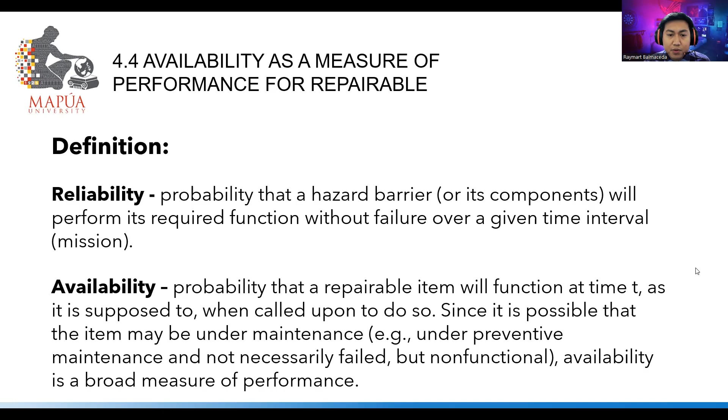As such, availability is the probability that a repairable item will function at time t as it is supposed to when called upon to do so. Since it is possible that the item may be under maintenance, such as under preventive maintenance and not necessarily failed, but non-functional, availability is a broad measure of performance. There are several representations of availability.

The most common ones are: number one, instantaneous or point availability of a repairable item at time t. A of t is the probability that the item or hazard barrier is functioning up at time t. Number two, limiting availability, or A, is defined as the following limit of instantaneous availability A of t, wherein A is equal to the limit of A of t as t approaches infinity.

Number three, average availability, or A bar, is defined for a fixed time interval t as A bar is equal to 1 over t integral from 0 to t A of t dt. And number four, the respective limiting average availability is defined as A1 bar is equal to the limit of 1 over t as t approaches infinity integral from 0 to t A of t dt, as shown on equation 4.25.

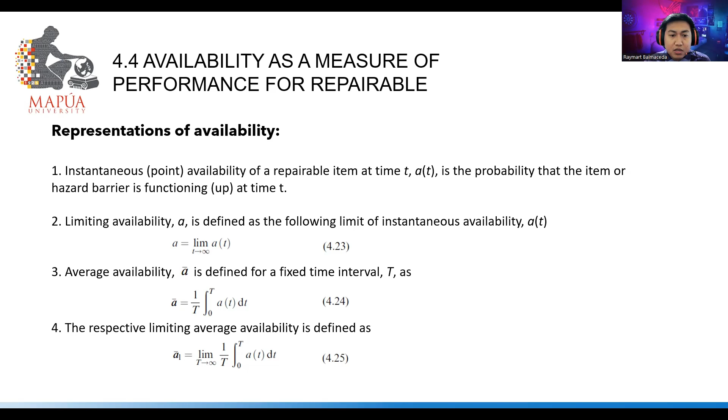So it should be noted that the limiting average availability has narrow applications. We elaborate on these definitions of availability in the next slides. If a hazard barrier or item is non-repairable, its availability coincides with its reliability function, R of t, wherein A of t is equal to R of t, equal to the equation as shown in equation 4.26, where lambda t is the failure hazard rate function.

The unavailability, Q of t, is obviously related to A of t, as Q of t is equal to 1 minus A of t. So from the modeling point of view, repairable barriers, or here hardware items, can be divided into the following two groups. One, repairable hardware items for which failure is immediately detected, or revealed faults. And two, repairable hardware items for which failure is detected upon inspection, sometimes referred to as periodically inspected or tested items.

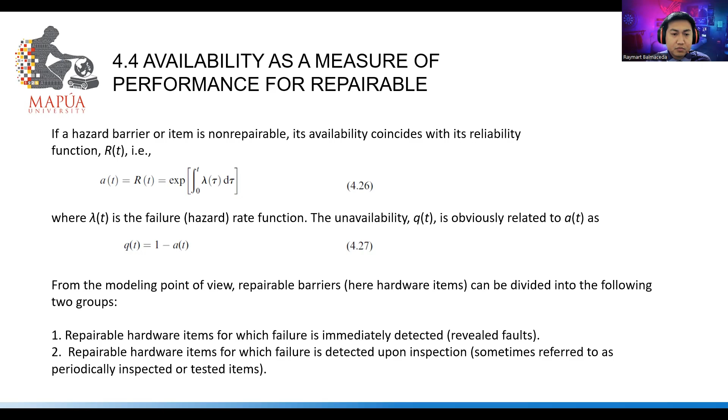Next, we go to 4.4.1, instantaneous or point availability. For the first group of hardware items, it can be shown that by using a Markov process representing two states of down and up, the probability that the item remains in each of these states are availability A of t and unavailability Q of t, respectively. The following system of ordinary differential equations represents this Markov process.

So the derivative of A of t is equal to negative lambda of t A of t plus mu of t times Q of t. And the derivative of Q of t is equal to lambda of t multiplied by A of t minus mu of t multiplied by Q of t, where transition rates between the two states are ROCOF lambda of t and the rate of occurrence of repair or maintenance mu of t.

In this case, examples of the mathematical forms of lambda t and mu of t are those of 4.12 and 4.17. For the simple case where no trend in the ROCOF and rate of occurrence of repair exists, solving 4.28 yields the equation 4.29. Note that in 4.29, mu is equal to 1 over tau, where tau is the average time required to repair or maintain the hardware systems. Sometimes, tau is referred to as the mean time to repair or MTTR. Clearly, MTBF or mean time to failure is equal to 1 over lambda in this case.

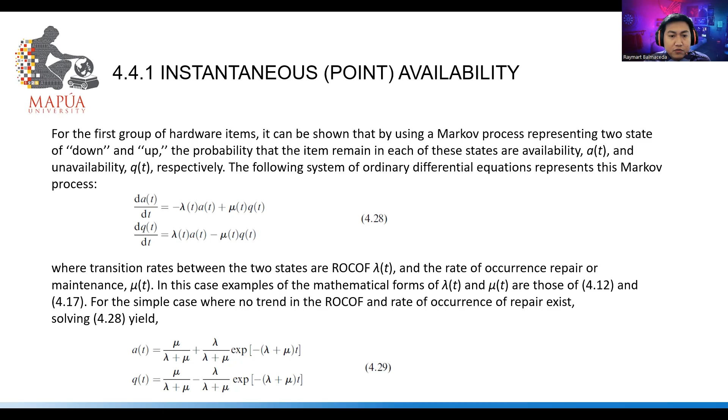For simplicity, the pointwise availability function can be represented in an approximate form. This simplifies availability calculations significantly. For example, for a periodically tested or inspected item, if the maintenance, repair, and test durations are very short compared with the length of operation time and the maintenance, repair, and tests are assumed perfect, one can neglect their contributions to unavailability of the system. This can be shown using Taylor expansion of the unavailability equation.

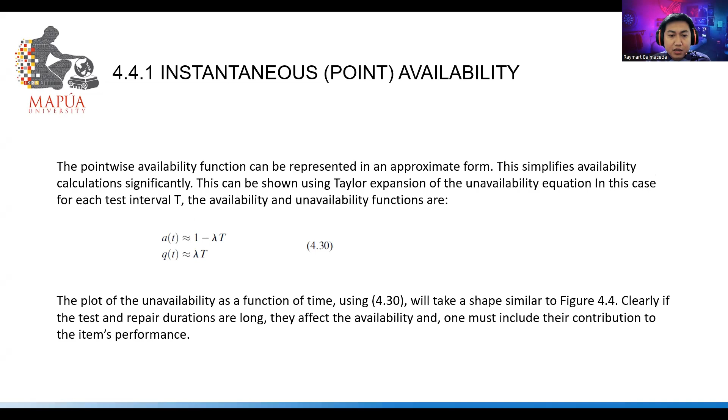In this case, for each interval t, the availability and unavailability functions are A of t is approximately equal to 1 minus lambda t, and Q of t is approximately equal to lambda t. The plot of unavailability as a function of time using the equation 4.30 will take a shape similar to that in figure 4.4. Clearly, if the test and repair durations are long, they affect the availability, and one must include their contribution to the item's performance.

Vesely et al. have used the approximate pointwise unavailability functions for this purpose. The functions and their plot are shown in figure 4.5. The average values of the approximate unavailability functions shown in figure 4.4 and figure 4.5 are presented in table 4.2.

It should be noted that due to imperfect test and repair activities, it is possible that a residual unavailability Q sub 0 would remain following a test and repair. Thus, unlike the unavailability function shown in figure 4.4, the unavailability function in figure 4.5 exhibits a residual unavailability Q sub 0 due to these random imperfections.

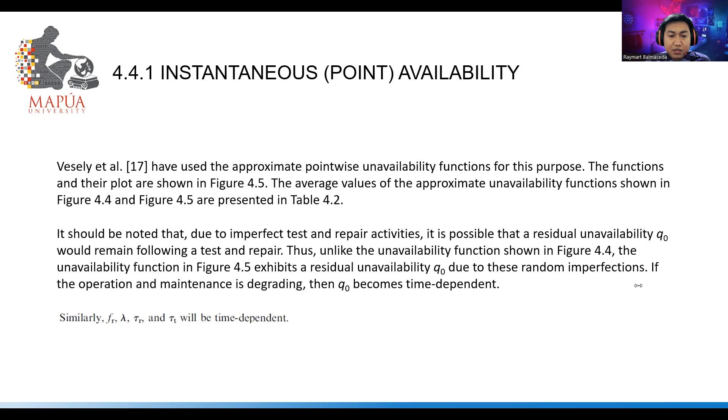If the operation and maintenance is degrading, then Q sub 0 becomes time-dependent. Similarly, f of r, lambda, tau of r, and tau of t will be time-dependent. Figure 4.4 shows approximate pointwise unavailability for a periodically tested item.

The equation representing the pointwise unavailability of periodically tested or inspected items when there is no trend in ROCOF and rate of occurrence of repair or maintenance is obtained from equation 4.31, where tau of t is the length of test, preventive maintenance, or both, and tau of r is equal to the length of repair or corrective maintenance, given the test reveals a failure or fault.

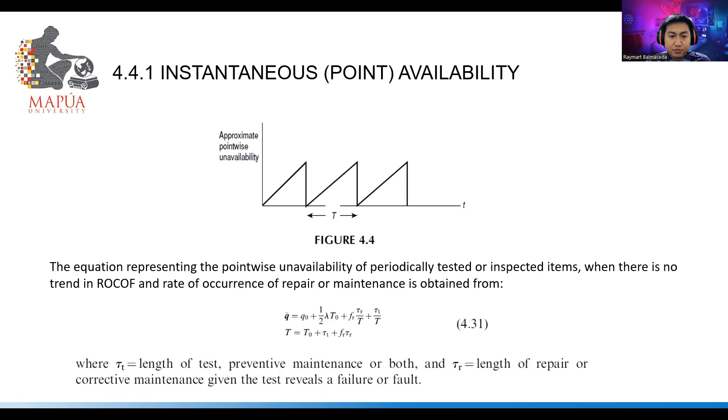Next, we go to 4.4.2, limiting point availability. It is easy to see that some of the pointwise availability equations discussed in section 4.4.1 have limiting values. For example, equation 4.29 has the following limiting value: A is equal to the limit of A of t as t approaches infinity, which is equal to mu over lambda plus mu, or equivalently A is equal to MTBF over MTTR plus MTBF.

Equation 4.32 is also referred to as the asymptotic availability of a repairable system with a constant ROCOF. So just to be clear, MTTF stands for mean time to failure and MTTR stands for mean time to repair.

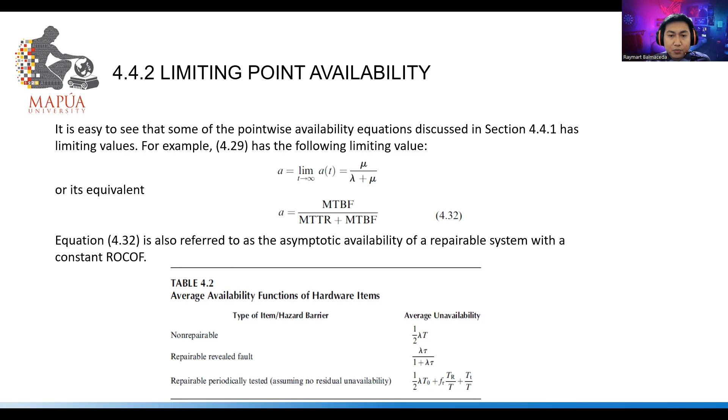Figure 4.5 shows pointwise unavailability for a periodically tested item, including test and repair outages, wherein T T stands for test interval, TR average repair time, H, and TT average test duration, H, and F of R, frequency of repair, and Q of O, residual unavailability.

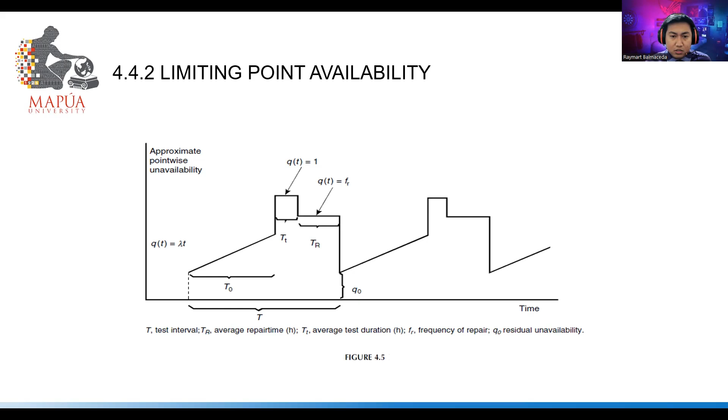Now, we go to 4.4.3, average availability. According to its definition, average availability is a point measure of availability over a period of time t. For non-inspected items, t can take on any value; preferably it should be about the length of the mission, which the item is supposed to work. For tested or inspected items, T is normally the interval of time between two successive inspections or tests if we assume that lambda T is very small over the period T.

So it is shown in equation 4.33, wherein Q is equal to lambda T over 2 and A is equal to 1 over t integral of 0 to t of 1 minus lambda t dt, which is also equal to 1 minus lambda t over 2.

Vesely have discussed the average unavailability for various types of systems. Table 4.2 shows these functions. Equations in table 4.2 can also be applied to periodically tested standby equipment, with lambda representing the standby or demand ROCOF, and the mission length or operating time replaced by the time between two tests.

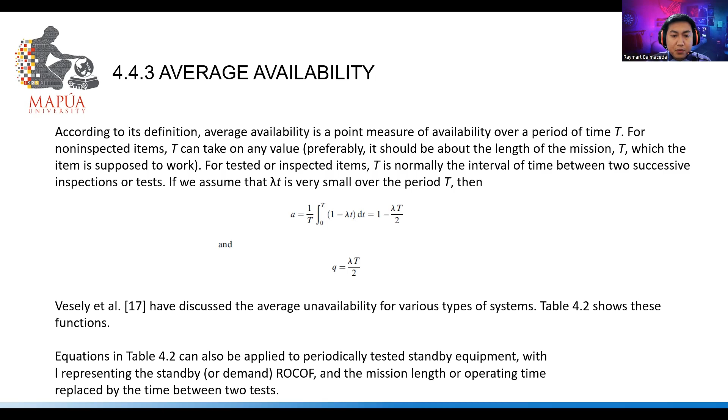So here we have an example. Example 4.5. For a periodically inspected and repairable hazard barrier, assume no trends in ROCOF and no residual unavailability. The following data apply. Lambda is equal to 1 times 10 to the negative 4 per H. T of O is equal to 1 month. So these are the given. T of T is equal to 2H. F of R is equal to 0.1 per inspection. And tau R is equal to 20H. So determine the unavailability of the barrier.

Using equation 4.31 that we discussed earlier with Q of O equal to 0, we have the formula: T is equal to T of O plus tau of T plus F of R multiplied by tau of R. So by substituting the values given, we will get 724 as the value of T. After getting the value of T, we will substitute it in the equation to get the value of Q bar, where Q bar is equal to Q of O plus 1/2 lambda T of O plus F of R multiplied by tau of R over T plus tau of T over T.

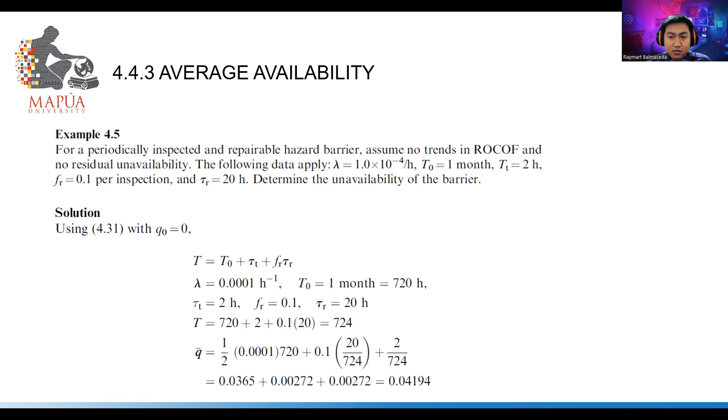So by substituting all the values, we will obtain 0.04194 as the value of Q bar. So again, this example represents the pointwise unavailability of periodically tested or inspected items when there is no trend in ROCOF and rate of occurrence of repair or maintenance. And that is the end of my report.